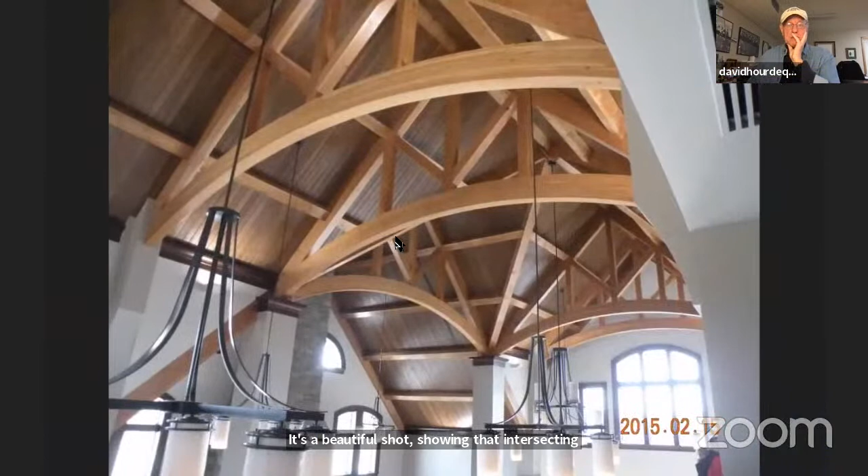There's a beautiful shot showing that intersecting transept. So there's the assembly area again. Let's get out here - I want to show you some.

So there's the steeple right there. This is the little gem that weighed 30,000 pounds, and at each corner is where it came down on that vertical web member of the truss. And I can't remember exactly how that was framed, but there was a piece running up the rake and down the other side.

I guess for all practical purposes, it was this part of the truss that was loaded with that vertical load, that trapezoidal load going across that face and going across this face. And all of these loads just work themselves down into each of the 4 faces. But it was a challenging little design.

So let's go back to the middle.

We'll stop right there. So any questions? Oh, by the way, the tension in these trusses was about 70,000 pounds, I'm thinking, something like that. How many bolts we got in here? 2, 4, 6, 8, 10. So, you know, that's quite a few. Probably at 4 or 5 kips. So 50, 60,000 pounds of tension at least in that bottom chord.

That one is St. Thomas the Apostle. Josh, if you're still with us, I'm sure you'll have some interesting things to say about this. This was another fun project with Lancaster County Timber Frames. Oh, here we go. I don't know who that is, but they're having fun. So I'm going to come back to this slide. This is actually a tension strap, and I'll explain it here in a minute.

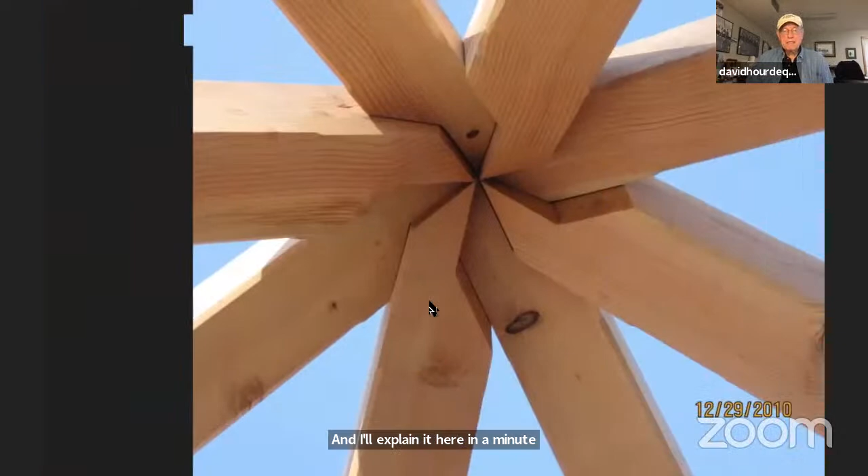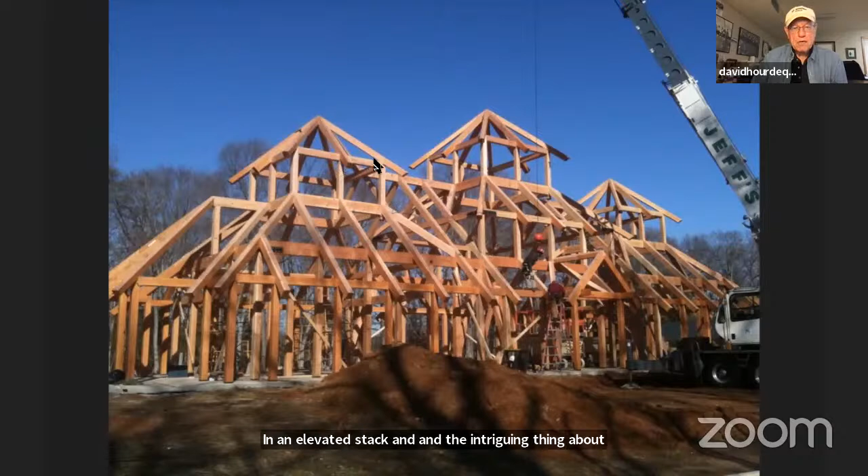So this structure had 3 square areas that were co-joined or had common walls in an elevated stack. And the intriguing thing about it was that the top plate up here is a tension ring. You can see the rafters all going down here. They're connected at the plates going around it, and they're trying to push that thing out. If you imagine a load down at the peak, it just wants to spread everything apart. So up at these corners, you have to put straps around the corners or knife plates inside the timber or something to take the tension.

And the way that you do that, I just divide up the forces into 4 components. I don't worry about this rafter; it's going along for the ride. It's the ones at the hips that define the tension ring. When you put all the design loads in, this has a certain compression in it that gets transferred into this corner, and it's trying to shove the corner in a direction parallel and collinear with the hip. So you can divide that up into components, so you can design a strap that goes along the plate in one direction and the plate in the other direction to take that tension. And so that was the intriguing part about this.

And so we start cascading down through the structure. You go from the tension ring, and then you've got these posts in here. Now this gets laterally stabilized later. Don't worry about the racking. That was all done with shear walls. So you come down here, and now we've got another plate line around here. Well, with the loads on that, it's now a compression ring. You're pushing up on it, so it kind of works in reverse. And then down here you've got another tension ring, and right there is that strap that he's working on, I think. And it's a pretty hefty piece of steel.

Usually you'll find that 1/4-inch plate steel can be used for this, and I'm not sure why that's so far apart. Normally, you know, if you can, you try to get them up in the middle. I'm sure there was an aesthetic reason for this. Nothing wrong with it, but you can see the top of the corner post cut off here to have a housing to engage that rafter, so that thrust goes into the post, and the post is trying to come out of the screen and toward your left, and these straps keep everything retained.

And that handsome fellow looks like he needs a break. That looks like hard work to me.

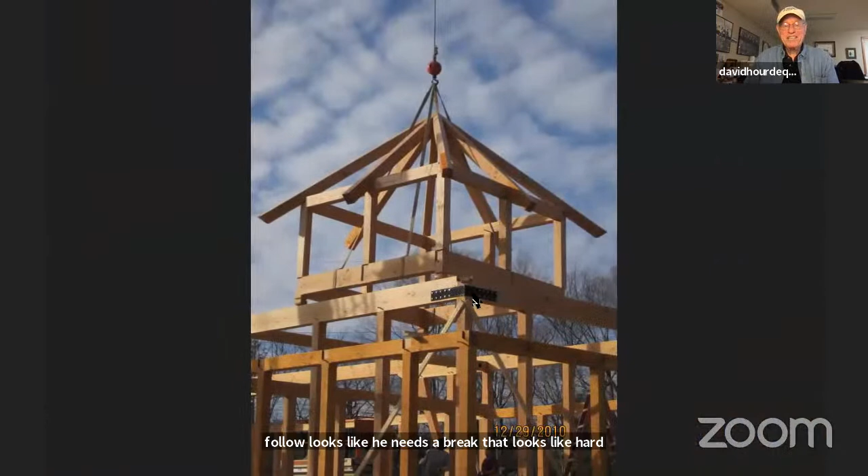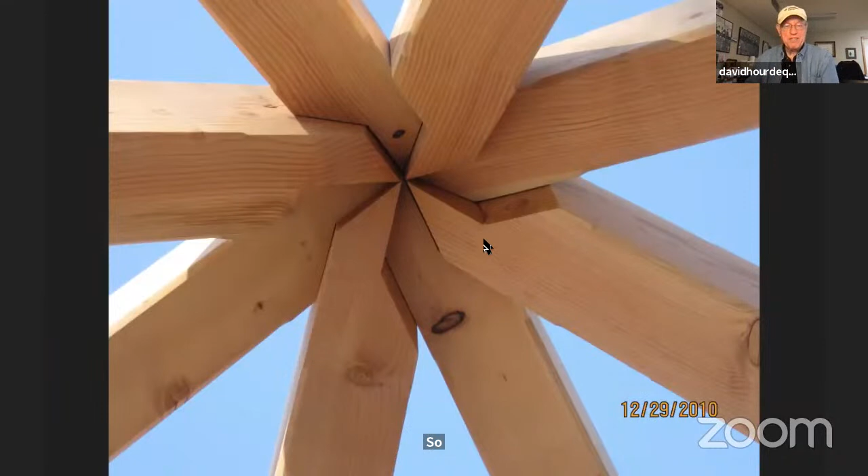Here you see the strap in place going around this tension ring here at this level. And I think this is probably one of the most exquisite joints I have ever seen. Josh, my compliments to you. I showed this to Dan Kaiser earlier today, and he said, I have got to try to do that. So any of you that are good at geometry, maybe you could construct this freehand. Josh will, for $8, send you the secret formula.

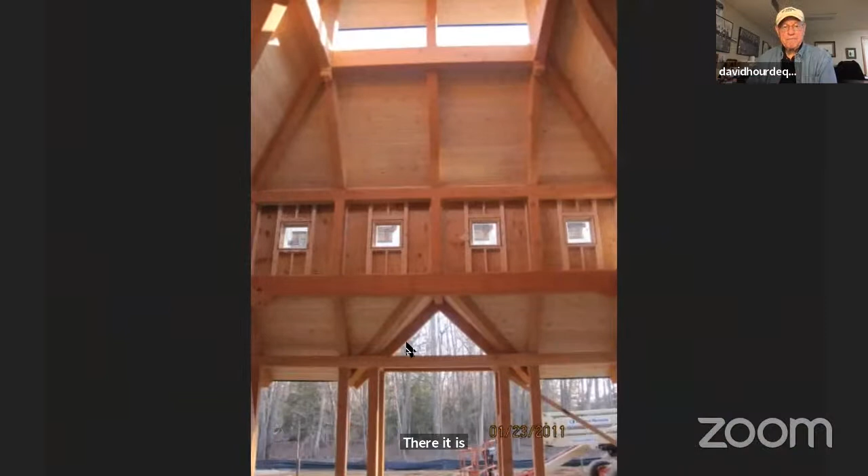So there's another shot. St. Thomas the Apostle, beautiful shot looking up through the core of the intersecting cascading squares. There it is, completed. Absolutely beautiful. I can't take credit for how pretty any of this stuff is. I tell people I am to engineering what an orthopedist is to medicine. I just work on the bones of the building, and I try to keep them from breaking, and that's what an orthopedist does. And you get an idea of the volume.

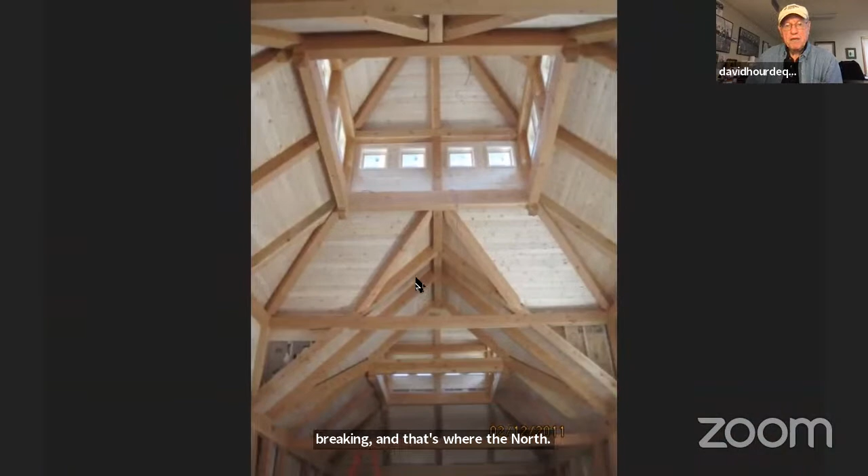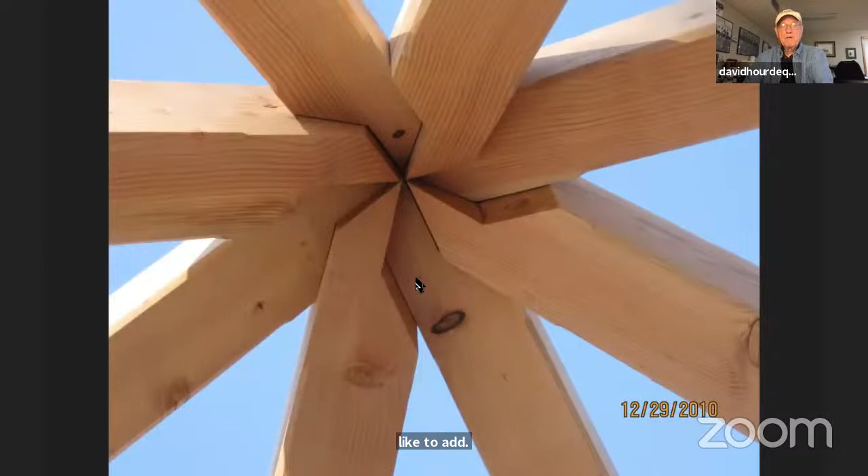Josh, anything you'd like to add? Josh, you there? Hello. Hi, can you hear me? Yeah, we can hear you. All right, wonderful. So yeah, it sure was a lot of fun to do.

David, maybe you can flip back one slide, like a longer shot. So you can kind of see, yeah, actually that was perfect. So we actually assembled the upper cupolas on the ground, and then the lower hip rafter, you see that has kind of an overhang. We set each of those hip rafters individually, and then we're able to tether it down on the rafter tail outside and just hold it into position. So once all 4 hips were just sort of floating out there, we lowered the whole cupola down and nestled it into those hips. So a lot of precision fits there, but everything went really nice.

And yeah, that was me in that photograph, putting those lag bolts in that metal strap. I think there was 15 on either side. Let's just say it was a long day of running that impact gun. But yeah, this was a fascinating one because they didn't want any interior columns, and coming up with a system that could support all those layers without any interior columns. It was a lot of fun.

And the pinwheel, I call that the pinwheel joint at the peak. Yeah, those always work out really nice. And it's sort of in the vein of that reciprocal framing idea, which is a whole nother world. But yeah, this is my little contribution to that. Thank you, Josh.

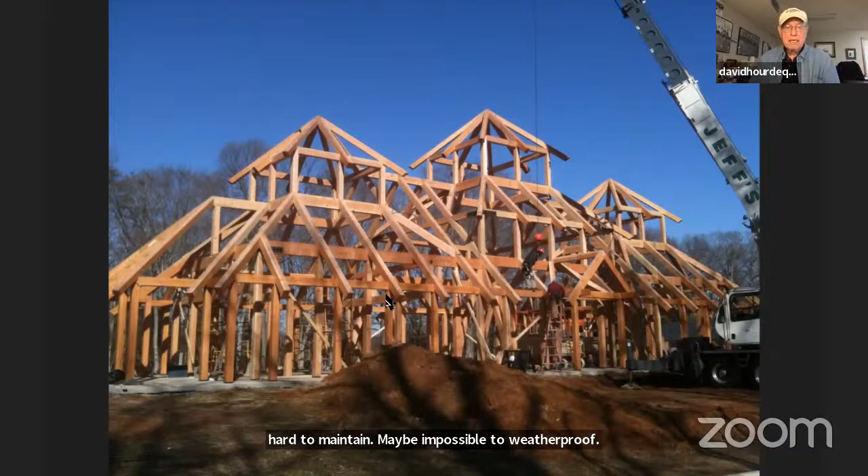In other words, if it's a situation that may be problematic, point it out right on the drawings that this condition could be problematic, maybe hard to maintain, maybe impossible to weatherproof, whatever the circumstances are, where it ran counter to your own good judgment, then I think you owe it to yourself from a liability standpoint, and also to the client, to point that out again, black and white, big, bold, square outline on the drawings, and we do that quite a bit. Any other questions?

Thank you, David, and that was really cool. And thanks, Josh, for bringing in some more insights here. And cool to hear that you're the lucky guy in the picture with the gun.

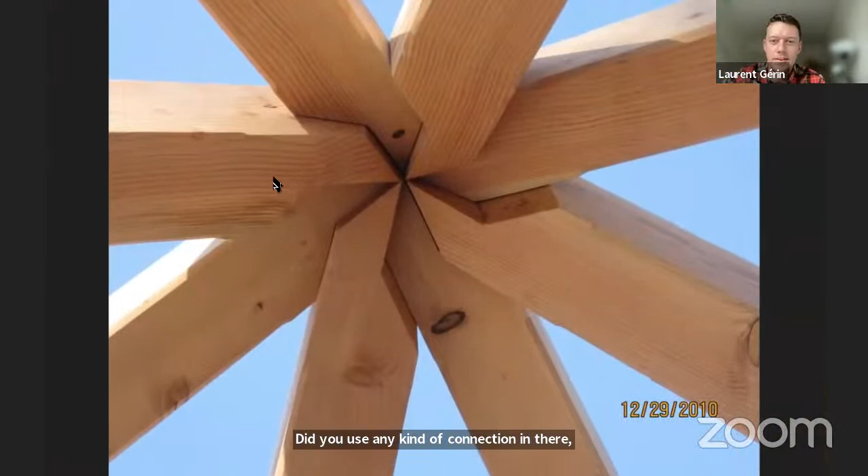No problem. So Hieronymus is asking here, the pinwheel joint, did you use any kind of connection in there, or are these purely just bearing on each other? Those are all toe screwed from above, right, Josh, as I remember? That's right. Yep. So they all nest into each other, and then once everything's planed out, then you can screw around in one direction. Then we usually go the opposite direction so that each member is screwed into the one next to it in both directions.

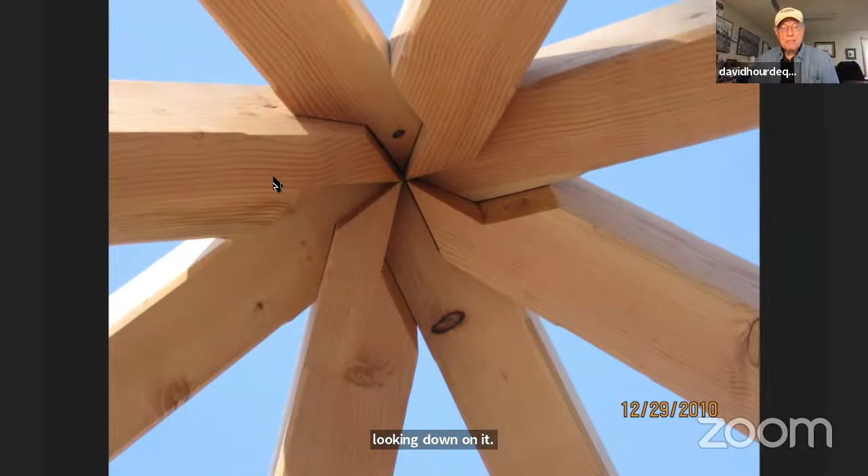So we have two toe screws in each member looking down on it. One goes down to the right, one goes down to the left in each joining timber. So is that right? As I recall. Yeah. That's right. Yep. Okay. What else?

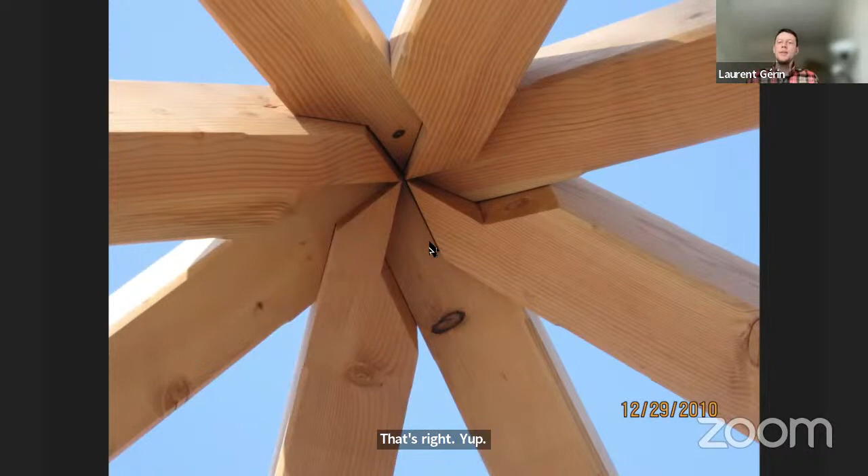Question for you with the analysis here. I think you mentioned previously you prefer to keep it simple with a 2D frame analysis or something like that. Obviously, this is not in 2D. Analysis of something like that with a tension ring, then the compression rings. Did you do this by hand? What did that look like?

Well, you could do it easily enough by hand. You've got half the load going into this diagonal and the other half going into that diagonal. So you divide that into two components, and you can just do longhand calculations. You put a point load up here. You've got some uniform load on here that doesn't amount to a whole lot. You just take 2/3 of the load and put it, I guess, or a third.

Anyway, whatever it is, and you can then just using, what am I trying to say? Won't come to me. Anyway, yeah, just simple statics. You can determine what the compression is in this member, and it will have a horizontal and vertical component, and you put the horizontal component in, and there's your tension ring. The vertical component is taken care of by the post, and the bird's mouth; this member will have a notch in the bottom of it.

And of course, to hold this member to the tension ring, you have to screw it down into it to resist the forces that want it to slide outward. In other words, if you don't restrain this diagonal hip member with screws to the post, then you can't develop the tension. So, no, I don't do a frame analysis on that. And if you stop and think about most structures, it's easy enough to figure out a 2D frame within it that you can analyze.

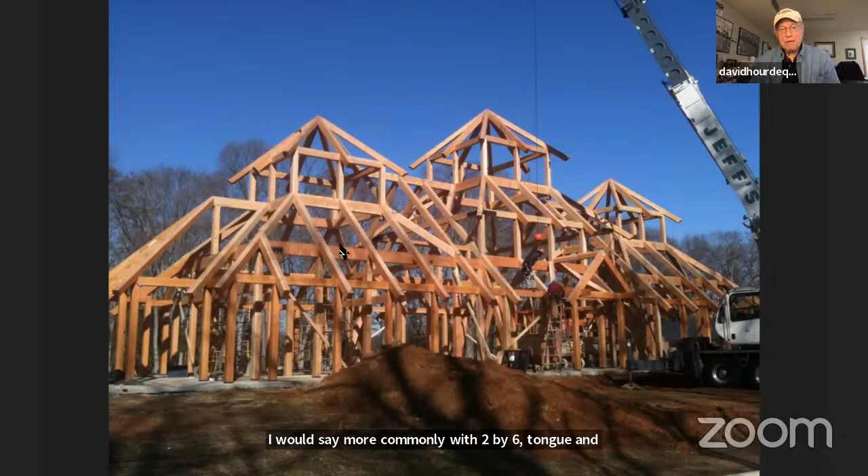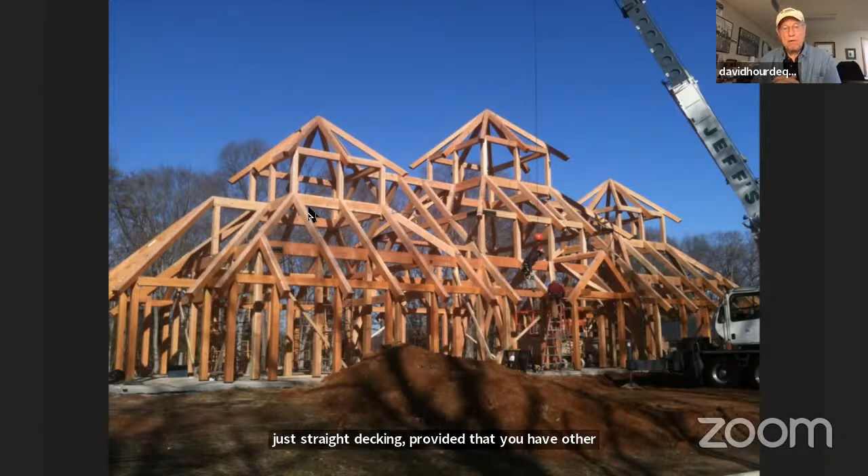So it may or may not apply here, but normally these timber frames are decked, I would say more commonly with 2x6 tongue and groove sheathing. And as you all know, it has a limiting diaphragm capacity of about 70 pounds per foot in allowable stress design. So sometimes you can accomplish it with just straight decking, provided that you have other structural auxiliary bracing to counteract lateral load, like diagonal bracing or diagonal members. Otherwise, you have shear walls.

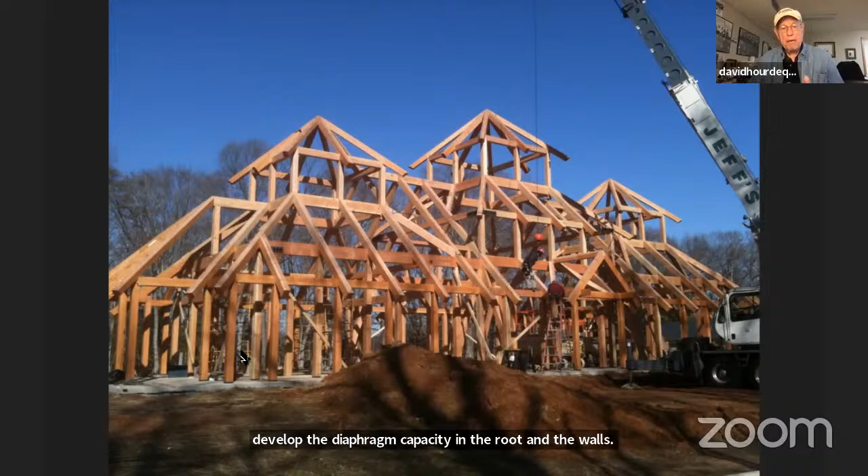And if the shear gets too high in these decks, then they have to be overlaid with structural wood sheathing to develop the diaphragm capacity in the roof. In the walls, in a timber frame structure, the walls normally pass outside of the timber frame. The reason for that is that these posts that support the structure will tend to shrink over time and move, and you don't want joints to be opening up inside the building.

So what happens is you allow the wood frame wall to pass outside, where the wood frame wall is at a post, then you connect it to the post to transfer the shear wall loads into the post to go down to the post connector. And if there's not a post convenient to do it, sometimes you have to use an embedded Simpson anchor or something like that. So that's how that is done.

And then on the inside, there's usually a 5/8 or 3/4 of an inch gap spacer made out of oriented strand board or something of the like between the timber frame post and the inside face of the frame wall. That strip goes up the entire length of the post. I wish I had a detail, and I can't sketch here, but let's say the post is 8 inches thick. That continuous piece of oriented strand board would be about 4 inches wide up the entire height of the post.

And so that gives you an opportunity to tuck interior sheathing like drywall or 1x tongue and groove behind the post. So as the post moves with changing moisture content, no joints open up. That's probably a long-winded answer to the question, but I hope I answered your question. If I didn't, come back at me again.

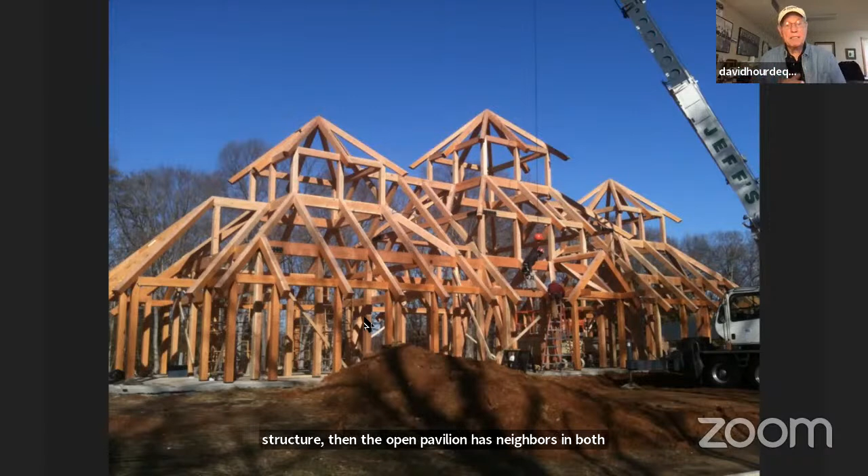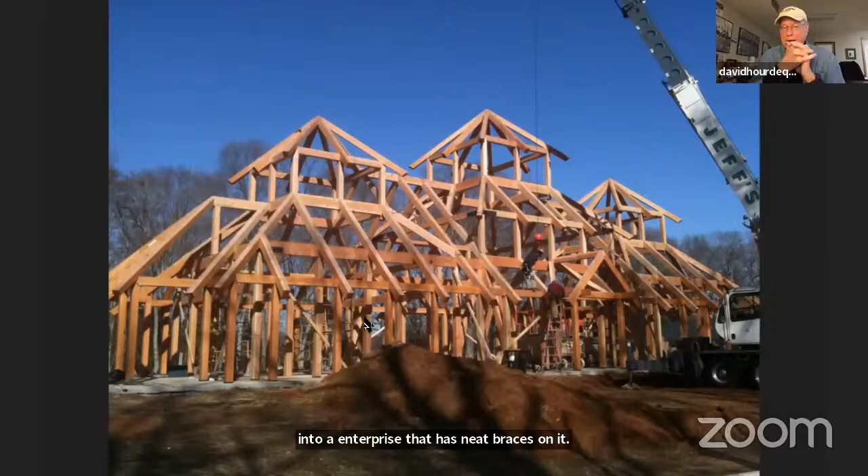It seldom happens that you can't do that. Now, if this was an open pavilion, a completely open structure, then it has knee braces in both directions from the post up to the trusses and to the plates. In that situation, when you have lateral wind load, those braces take the lateral load. You seldom need sheathing in the decking because the tributary area of wind force going into a frame with knee braces is usually fairly narrow, so you're not looking at a diaphragm shear situation of any consequence.

Let's see, we got 53. You want to look at another slide, or what do you want to do, Laurent? I think it's up to you if you want to quickly go through another project, or if anybody else has questions for David in general about his career, his work, or some of the projects we looked at, feel free to share them. I think we've got a few minutes here. Otherwise, in the meantime, David, go ahead. I think to quickly go through one more project.

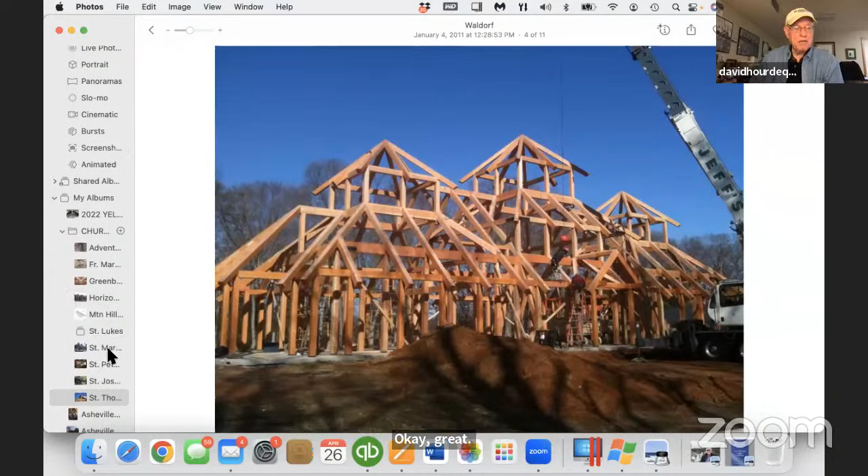Okay, great, so with a few minutes remaining, let me show you this. Josh, I apologize, wait, that's not St. Martin's, where is it? Huh, hang on. Well, heck. You know what, David, I think we've got 3 minutes left, so for everybody's time, we'll probably just stop it here if that's all right with you. Yeah, that's fine, that's fine.

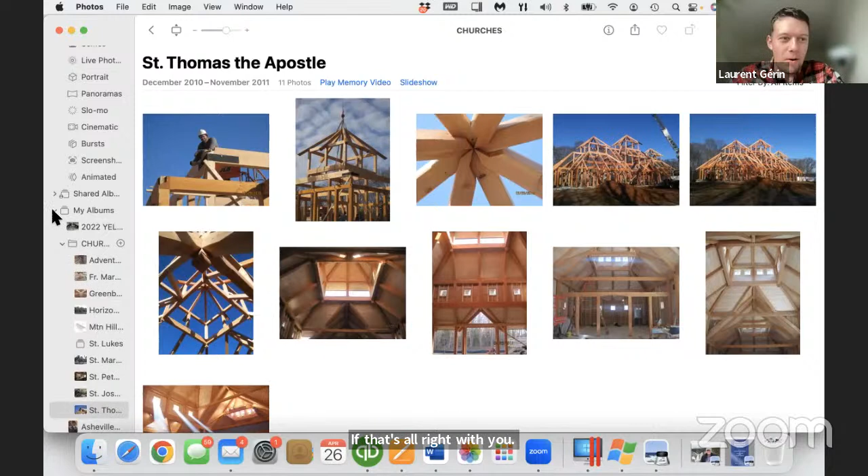Caleb's asking here, does the Timber Framers Guild have dumbed down courses for architects? Oh, do they have dumbed down courses for architects? Yeah, listen, all of their courses are dumbed down. I was like, we're all a bunch of dummies just trying to learn from each other. Seriously, a lot of architects belong to the Timber Framers Guild, and you'll find a number of architects around the country, not too many, but a few that just try to specialize in timber frame architecture, and we think that's great. The biggest problem we run into in the industry is working with architects who are not familiar with timber framing and then trying to school them into design principles.

You'd be amazed at how many architects and engineers out there don't know how to do a design or even sketch up the concept of a simple working truss. So it's a little bit disconcerting.

That's really cool, and it's all stainless, I believe, right? All stainless steel, stainless bolts. Yeah. So you guys that are dealing with common lumber, come on over to the timber frame side and do some fun stuff with us.